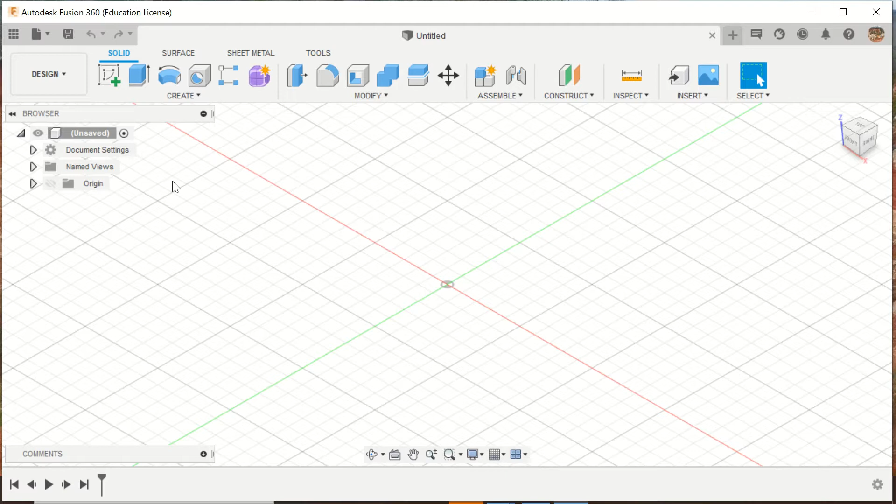This video is to hopefully demonstrate how to create the drawing from your design that you've saved in Fusion. So in order to do this, I need to open up some kind of design that I have.

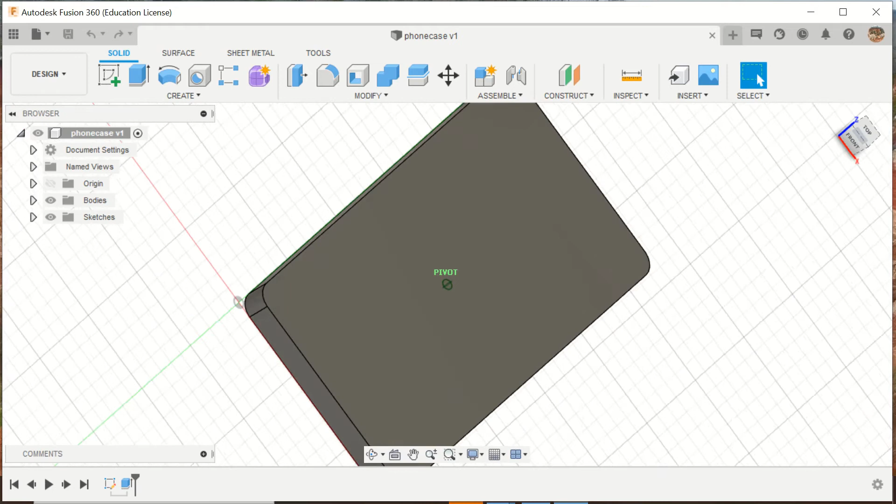I guess this actually might be yours, so I should be able to pull that up and we can look at it. Okay, so this clearly isn't finished, so you should have a finished one that you can pull up, but I needed to have some kind of design pulled up.

Once you have your design pulled up, it does need to be saved. Then you go to File in the upper left-hand corner, hover down to New Drawing, and then From Design. So it's from your existing design.

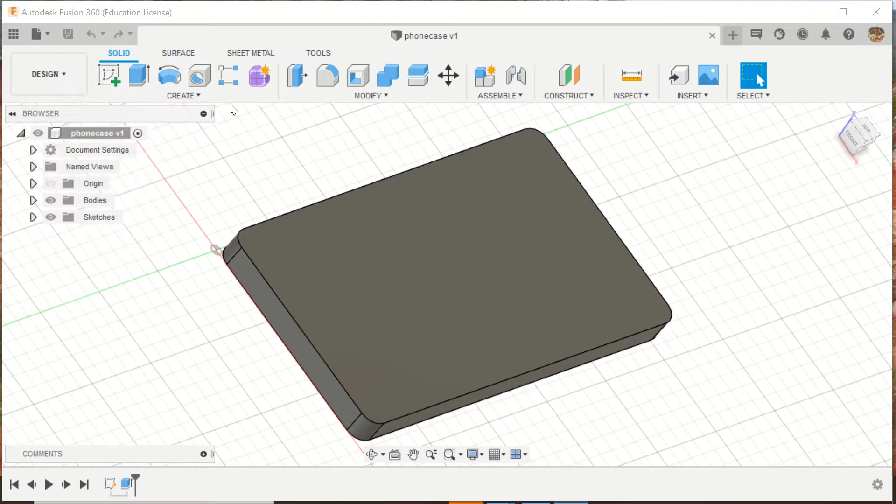Change this from ISO to ASME, and then have your units be whatever the appropriate units are for your phone case. So if you did it in inches, pick inches. If you did it in millimeters, pick millimeters. And for your sheet size, since I am going to print it, pick one of the 8.5 by 11.

Okay, so I have a piece of granola bar in my mouth.

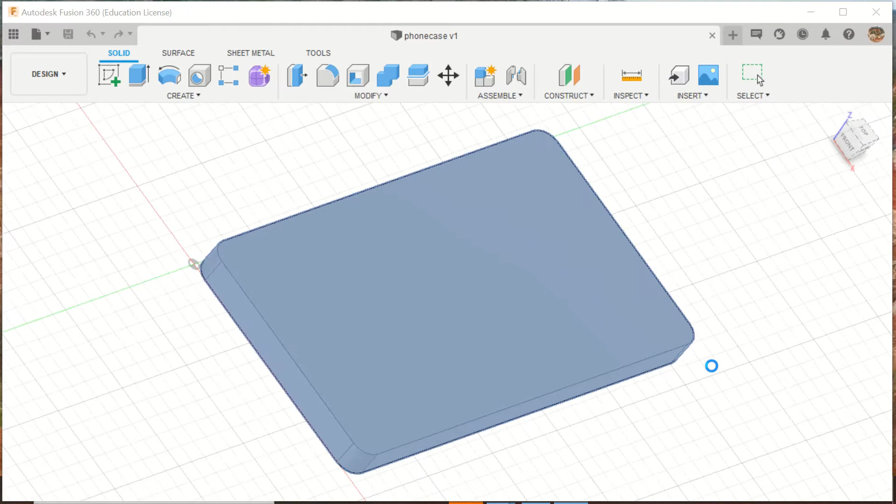You can either pick the horizontal or the vertical. I'll just pick the second one, 8.5 by 11, and give it a second to load. And there you have your template.

Now it's already going to ask you to place the base view. That is your front view, will be your base view. And what view is the front view? It just depends on how you oriented the design in Fusion.

So whether you were on the XY plane or the YZ plane, your front view should go in the lower left. Then you'll come up here to where it says projected view, right next to base view. Click projected view, and then click the parent view.

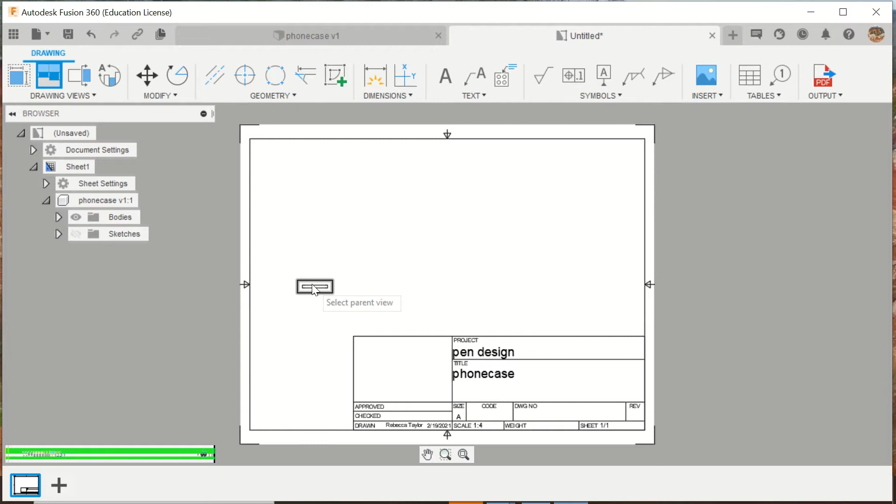Then you should be able to just drag it, so it will automatically give you the top, and then you click to place. When you come over to the upper right, it will automatically change it to an isometric oriented how you had it in Fusion.

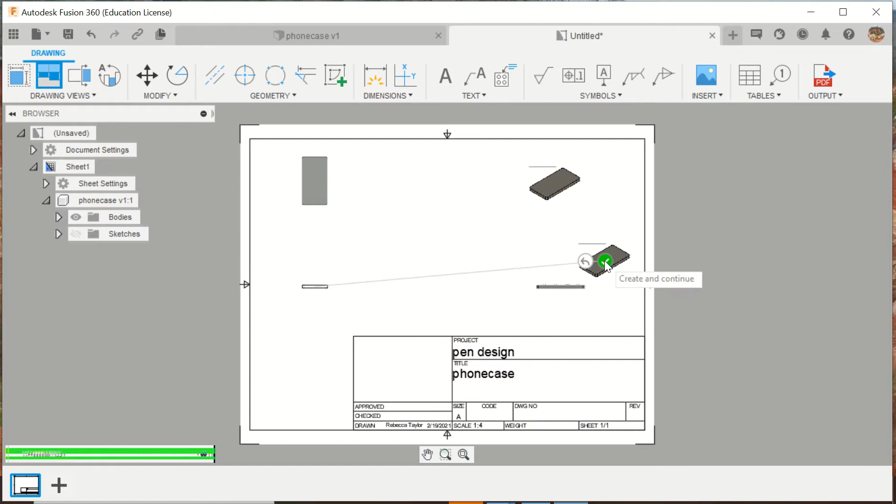Click to place, and then it will automatically line up for your right hand view. Click to place, and then hover over the little green check mark to close that out. Now this is obviously pretty boring, but yours will be more interesting to look at because you will have the cutouts and stuff.

Looking at it, I'm thinking we should probably change the scaling on this. So I selected the view, right clicked to edit view, and see where it says the scale is 1:4. I'm going to play around with that scale, like 1:5.

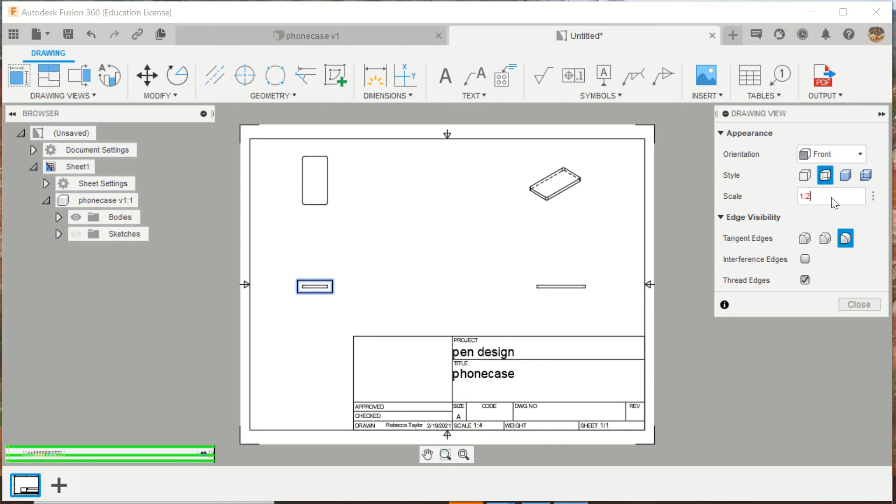So that made it smaller, so I don't really want it any smaller. I'm going to change it maybe like 1:2. Now I actually like that better, except that top view is kind of extending outside the margins, but that's a little bit better.

So I'm going to go ahead and click OK, and then see if I can drag that down, and I can. So pull that down. You can right click, and if you want to change the scaling, I would change it on the parent view, and then it'll automatically change the others to go with it. You might be able to do it with any of the views.

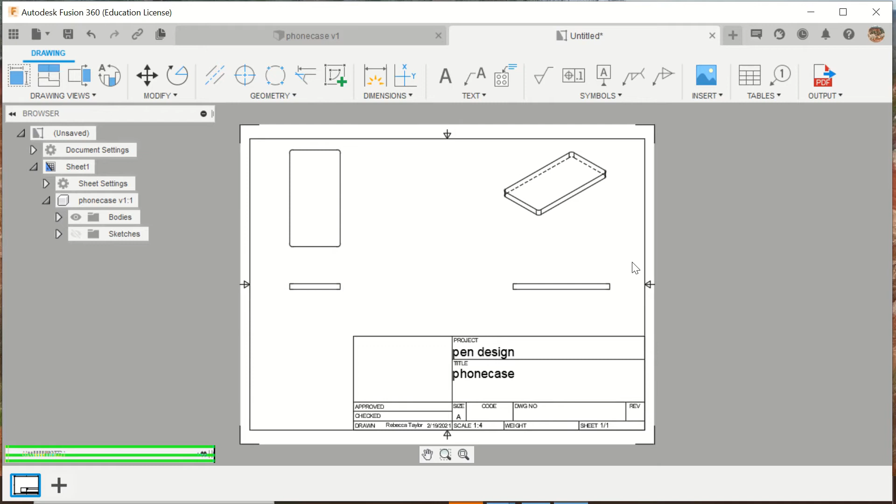Now for your isometric up here, go ahead and click on the isometric to select it, then right click and do edit view on that, and come over here to where my mouse is hovering. You can either pick the view that will color it and show the hidden lines, or the one that won't. So that'll give you just a straight isometric, and this one will show the hidden lines.

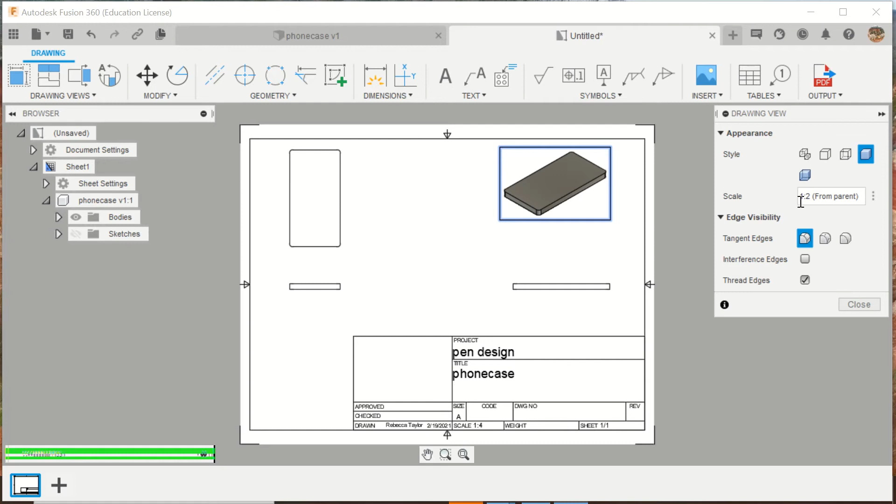Pick one of the two, and notice it says the scale factor on that is 1:2, and it's coming from your parent view. Then close that.

Then you'll need to dimension it, and your dimension tool is right here in the middle. You'll make sure that you dimension all of the relevant dimensions, and make sure that you don't dimension to any hidden lines. Now if you have trouble, like you could tell right there, my mouse is kind of skipping over it.

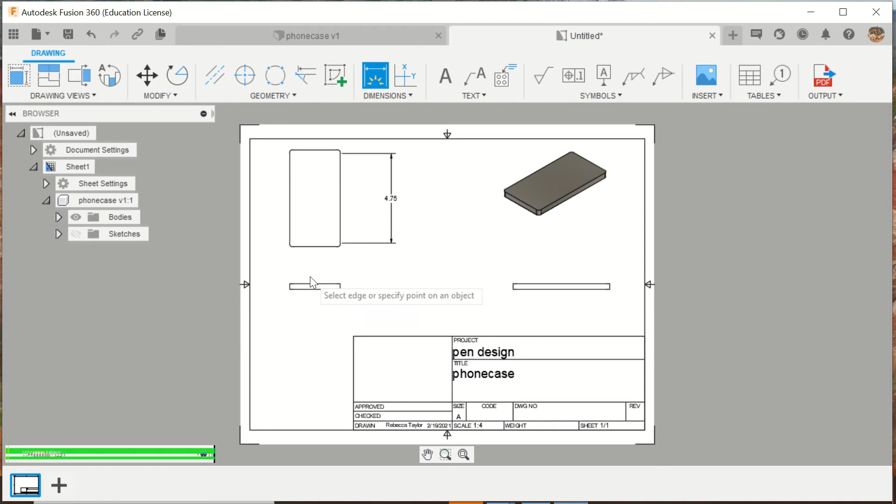So I'm going to use the scroll wheel and just zoom in so that I can grab the view. It still doesn't want me to grab that side, so I'm just going to keep zooming in until it lets me grab it, and then I can zoom out.

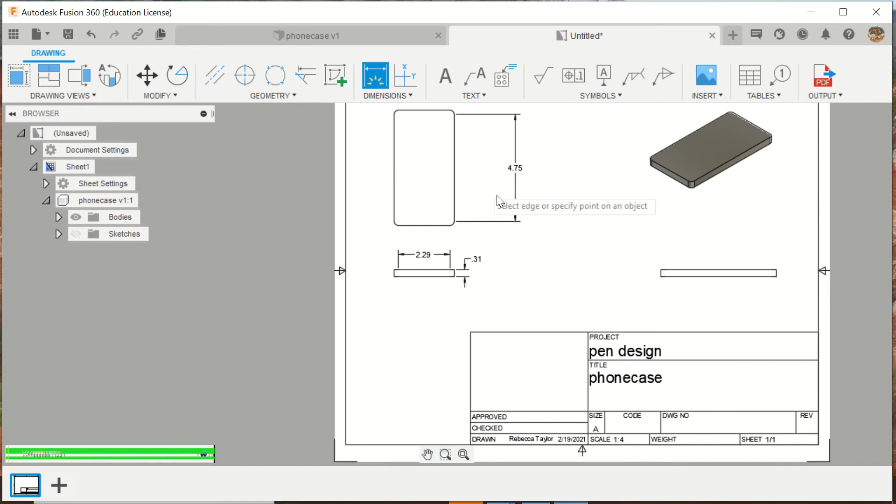You don't want to over dimension. So if I hover over this, you'll notice it's the 4.75 - that's the same dimension that you have over here. And if you were to get this dimension here, I could zoom in enough so it grabs it, and it'll be maybe the same dimension that we had on the other view.

Now, you do want to make sure that you dimension everything, but you don't want to over dimension. You also want to make sure that as much as possible, you keep your dimensions in this interior - you don't want the dimensions out here in the margins. You don't want to dimension to any hidden lines, and you don't dimension on your isometric. Okay, so those are the main rules for the dimensioning to get that done.

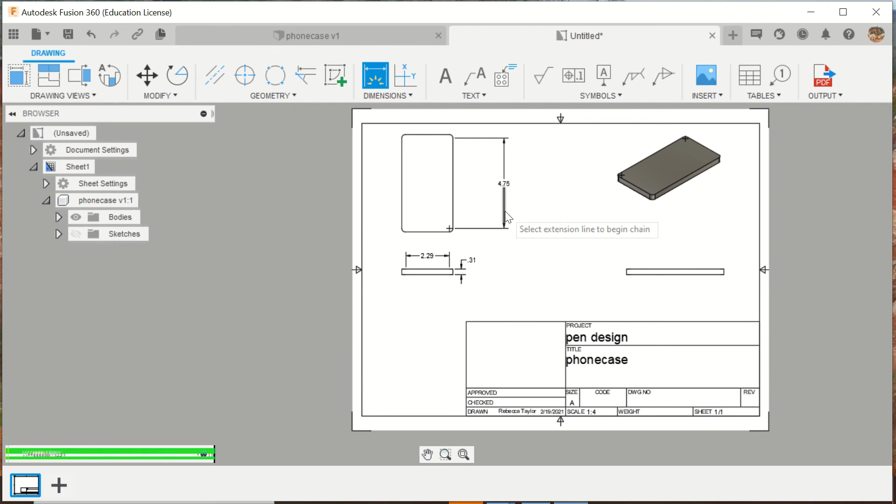Now, when you're ready, you can save your design, and I think the way people were doing it is they were saving it and then exporting it as a PDF. I wasn't on that end of how people were sending me the PDF, but you want to save it as a PDF and then attach it to an email and send it to me.

I don't actually want to save this design because it's not a real design, so I don't want to save it. But that is pretty much what you would do. And if you have issues getting it as a PDF, at least save the drawing as is, and then we can work on converting it to a PDF and sending it to me once you're back in class.

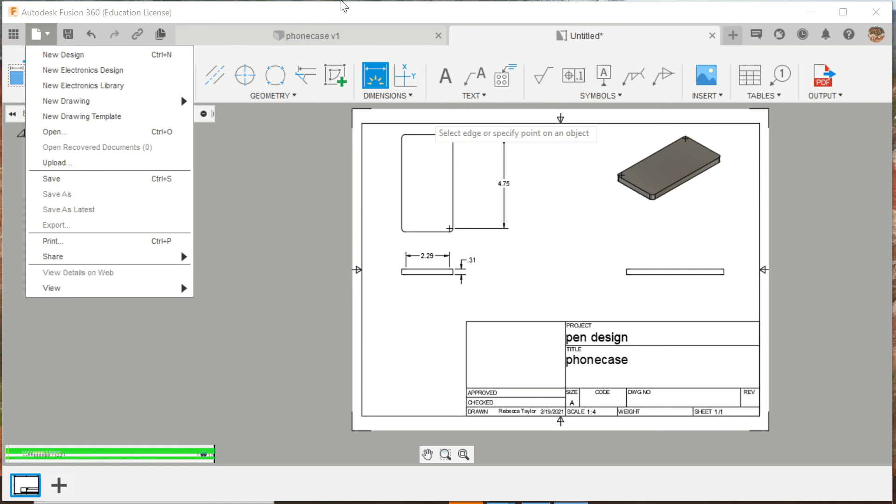So I hope that helps. You can go back and rewatch this video and click through, pause it, pull it up on your computer and see what you can do with it. Hopefully this is helpful for you.